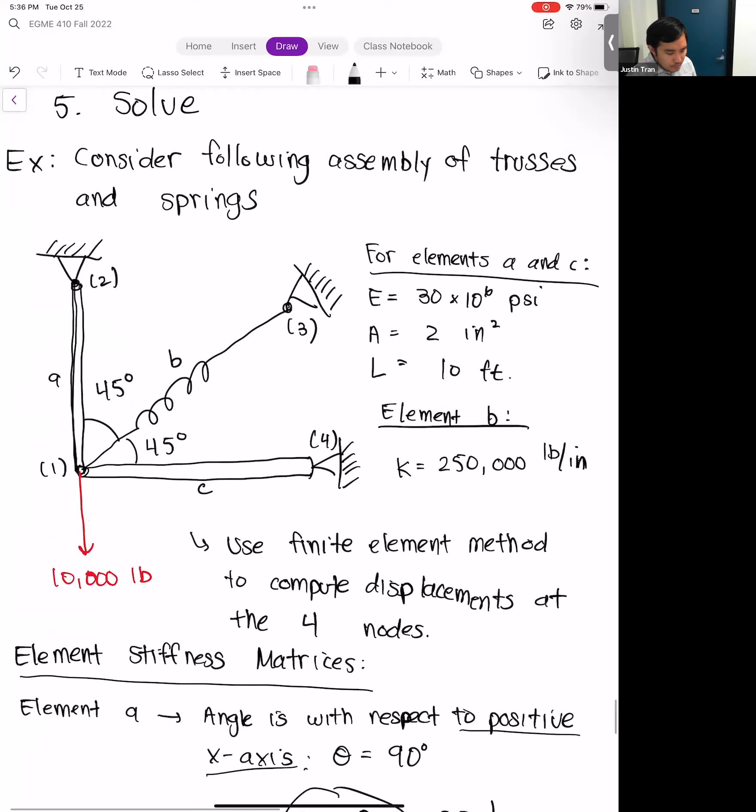Let's go ahead and pick up where we left off, which was a question: can we edit the geometry? Yeah, I don't mind if you edit the geometry. That could actually be one of your separate conditions, or one of your separate simulation situations. People were also asking if they can change the material properties as a different condition - that's definitely possible too. If you want to change the geometry for a different condition, you can definitely do that as well. I think some geometries will be easier to do that with. The bracket will probably be the easiest one because I think that's an actual design modular part, so you can open that up and change it. But yeah, feel free to change the geometry.

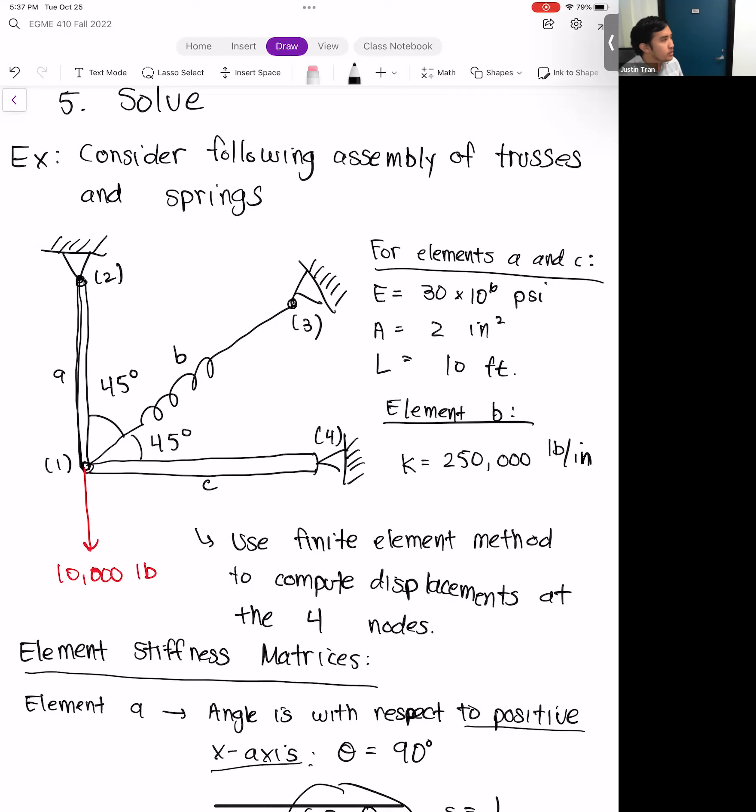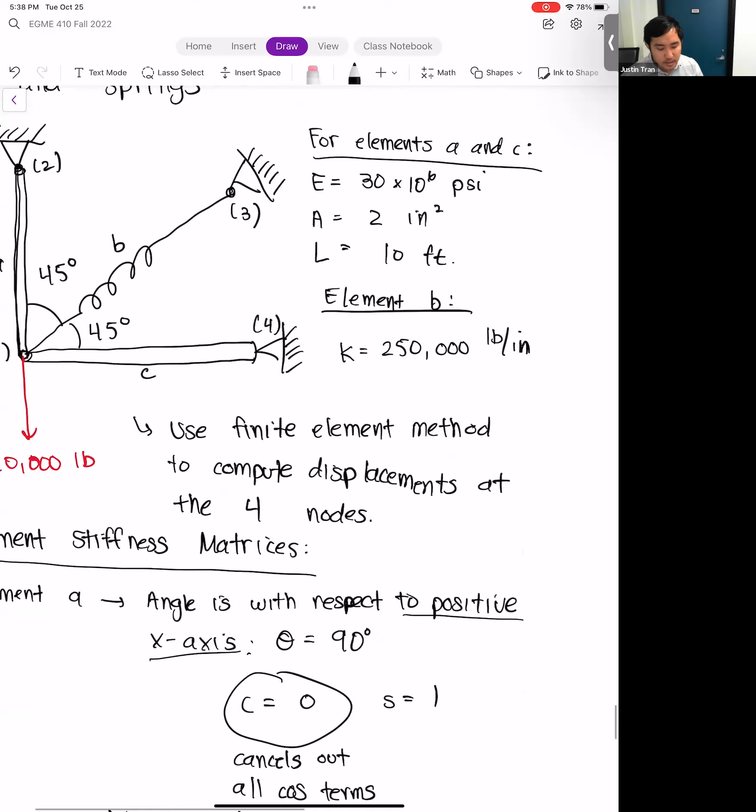Where we left off last Thursday, we were talking about how to do two-dimensional direct stiffness problems. We spent a good amount of time deriving this monstrosity - this is the element stiffness matrix for a 2D truss element. The reason we spent so long deriving this is that when we do 2D problems, we want to make sure we compute element stiffness matrices in the same coordinate system for every element. Because what can happen - let's say we have 3 elements, each oriented in a different direction. When we go through our finite element process of element stiffness matrix, assembly, boundary conditions, and solving, we want to make sure all our element stiffness matrices are in the same coordinate system.

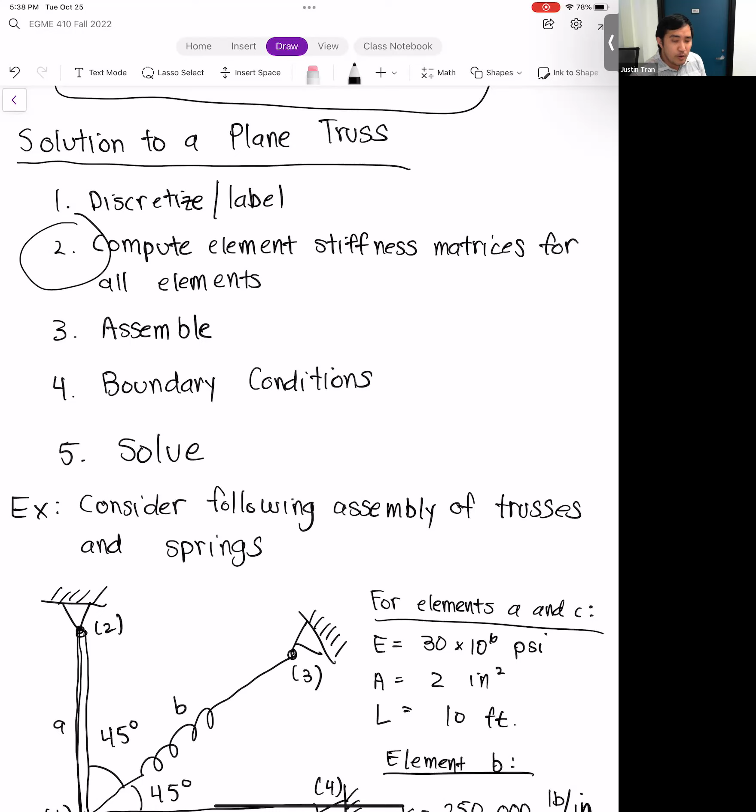Because if they're not, if they're all derived within their own local coordinate system, we can't actually assemble them into the same global system because they're all going to be relative to different parts. Okay, and so that's why we have this kind of complex 2D element stiffness matrix that contains a lot of sine and cosine terms.

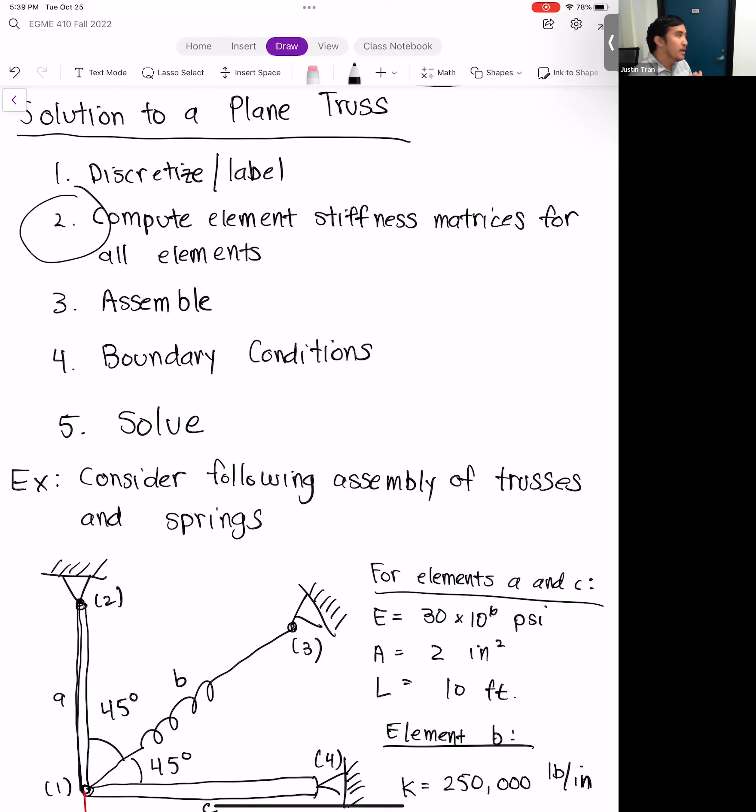Okay, but besides that, the process that we're going to go through is exactly the same. So we're going to go through this 5-step process of labeling the geometry, discretizing it, computing the element stiffness matrices, assembling everything, applying boundary conditions, and solving. It's the same 5-step process, it's just that it's going to take a lot longer because the element stiffness matrices are a lot bigger than they were before.

Okay, and so we kind of left off doing this example here. And so what we have is a 3-element system, and so we have 2 truss elements and 1 spring. And what we're interested in computing is the nodal displacements of the 4 marked nodes. So node 1, node 2, node 3, node 4. We want to compute those displacements based on the orientation of the truss elements and the load that's being applied.

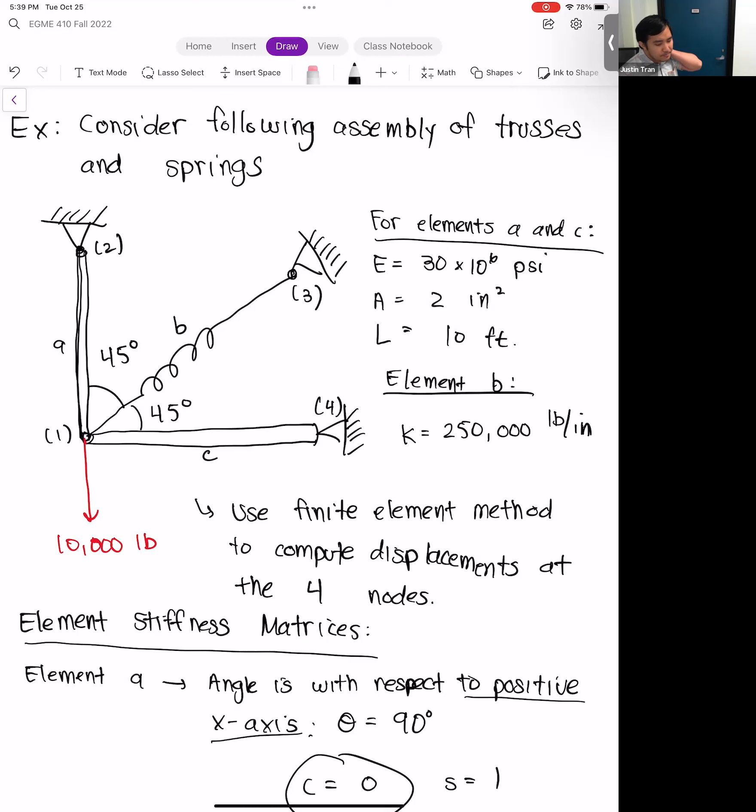All right, so of course we have the properties, the material properties for the elements. So for the truss elements, we have a Young's modulus, we have the cross-sectional area, as well as their length. And then for the spring element, we have its spring constant, which is 250,000 pounds per inch.

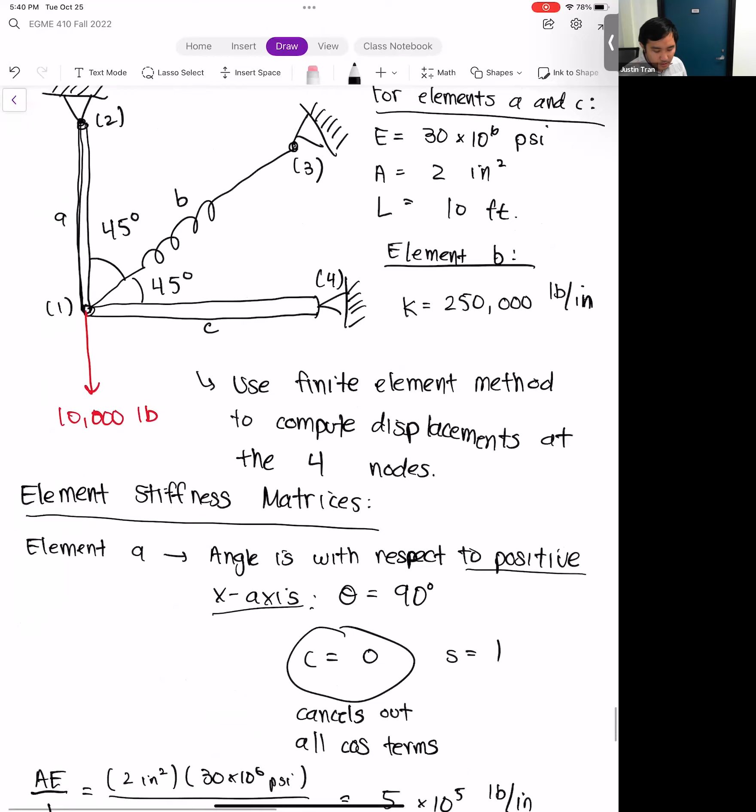Okay, and so to analyze this structure here, we're going to go through our direct stiffness methodology. So our first step is going to be to derive the element stiffness matrices for each of the elements. Okay, and so we're going to start with element A, and element A is our vertical element here.

And so what we said for element A is that the first thing we have to do is to compute its orientation. And so relative to the positive x-axis, element A is rotated up 90 degrees. So what we say is basically the theta value for this is 90 degrees.

And so the next thing that we're going to compute here are the sine and cosine of that angle. And so at 90 degrees, it's actually really simple because the cosine of 90 degrees is 0, the sine of 90 degrees is 1. And when you have one of these sine or cosine terms equal to 0, what that's going to do is cancel out a ton of the terms in the element stiffness matrix. So when we plug in cosine equal to 0 and sine equal to 1 into our element stiffness matrix formulation here, we get the following element stiffness matrix.

And so we said that Ka is equal to 5 times 10 to the 5th multiplied by this matrix, where the majority of it are zeros, and we just have ones on some of the locations.

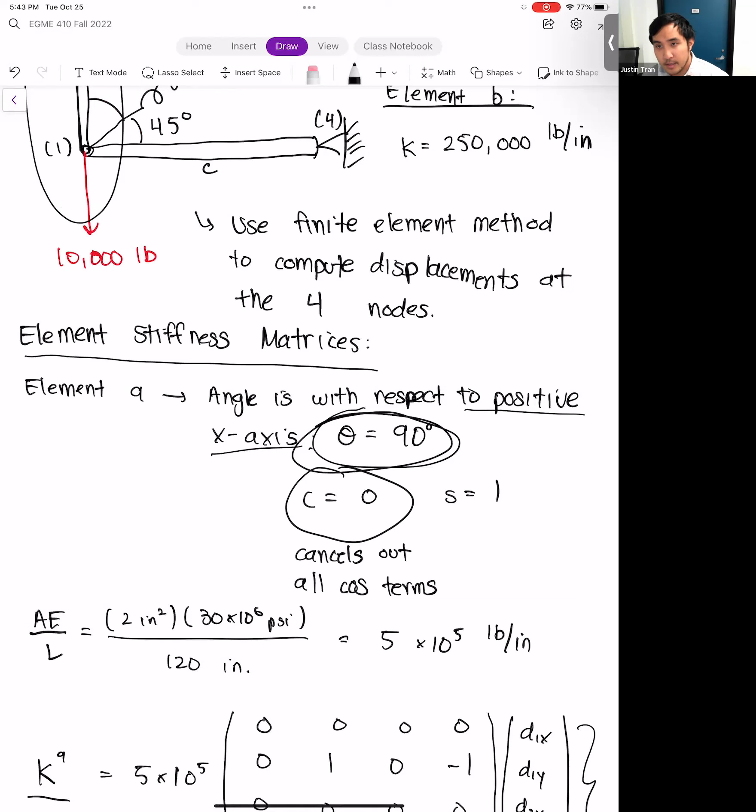Okay, so element B here is a spring, right? Our question - so d1x and d1y is used for all the elements? Yes, yes it is. Yeah, because all the elements are attached to node 1 right here, they're all going to involve d1x and d1y.

Okay, and so if we go back up to the figure here, we can see that element B is the spring, and it's kind of rotated up towards the top right. And so the angle that element B makes with the positive x-axis - okay, so the angle that it makes is 45 degrees. So that's going to be theta.

I wrote that out because for this example, the angles are kind of exactly as they appear in the figure. But in the next example, this definition of the angle as the angle that it makes with the positive x-axis is going to be key. That's why I wrote it out there.

With a theta value of 45 degrees, let's compute sine and cosine. So we have C is cosine of 45 degrees, and cosine of 45 degrees is root 2 over 2. And sine of 45 degrees is also root 2 over 2.

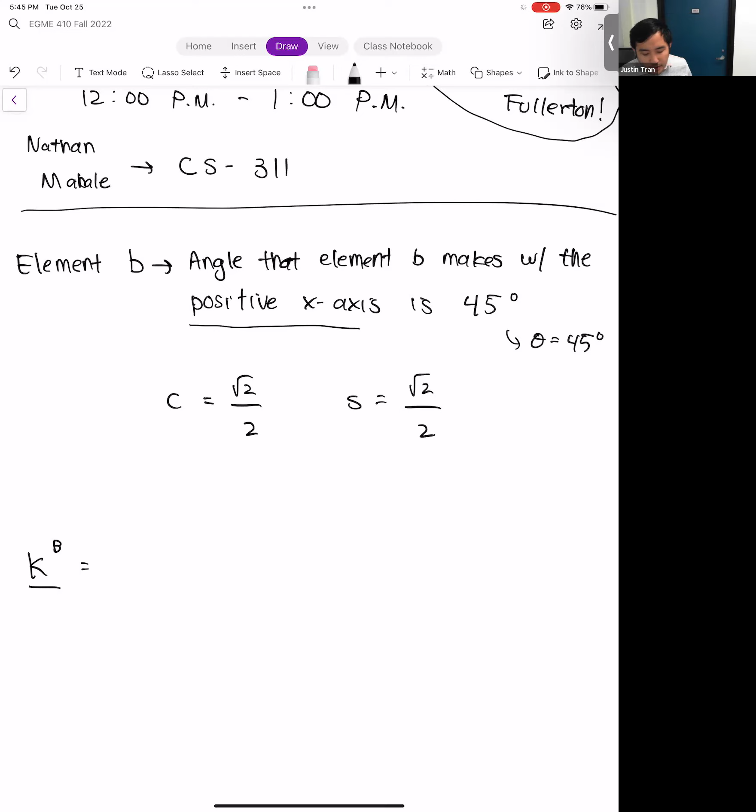And so KB - technically, we don't have the element stiffness. We haven't computed the element stiffness matrix for a 2D spring, but we can easily derive it. If you look at the element stiffness matrix for a 2D truss, what's out in front is AE over L. If this were a spring, all we're going to do is replace this with the spring constant K. Everything else on the inside stays the same, so all the sine and cosine terms are going to be the same because we derived those without really any knowledge of the truss anyway.

For element B here, our element stiffness matrix is going to be the spring constant K multiplied by all those terms. Let me write it down again: we're going to have cosine squared, cosine sine, minus cosine squared, minus cosine sine, sine squared, minus cosine sine, minus sine squared, cosine squared, cosine sine, and sine squared.

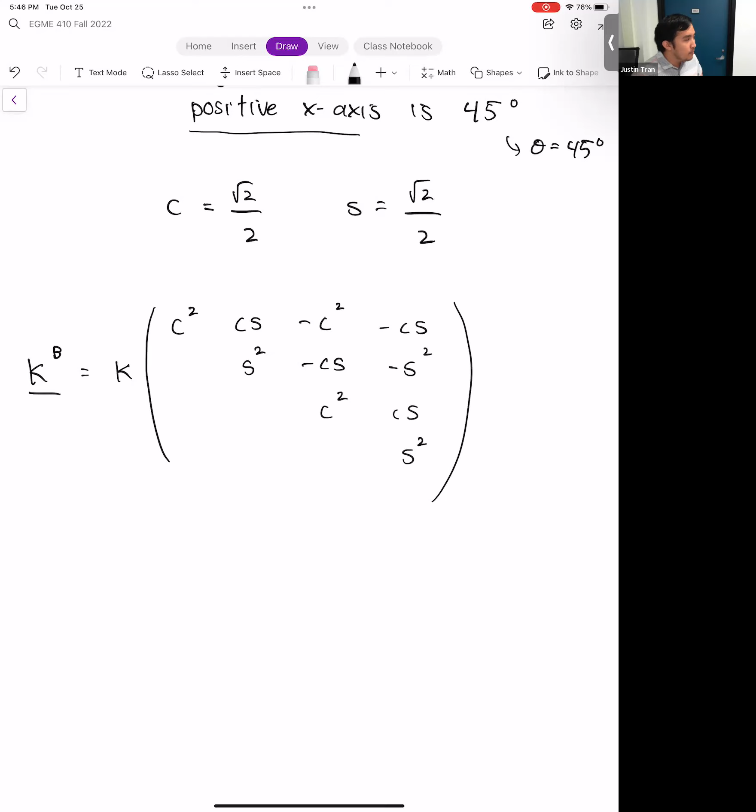Of course, this element stiffness matrix is symmetrical, so the bottom half is going to be just the same as the top half, just reflected over. Okay, so let's go ahead and plug in for this.

For this element here, our spring constant is 2.5 times 10 to the fifth. Then we're going to start plugging in for the cosine and sine terms. First we have cosine squared: root 2 over 2 squared is just 2 over 4, so that's 1/2. Cosine sine is root 2 over 2 times root 2 over 2, which is 1/2. Minus cosine squared is minus 1/2. Minus cosine sine is minus 1/2.

Among all the different angles that the elements can have - 0 degrees, 90 degrees, 180 degrees, 270 - those are the most ideal because those are zeros. But second place to that is 45, because with 45 degrees you end up with just a bunch of 1/2s. The only thing you have to worry about is the signs.

Remember the trick I taught you last time: whenever you have a symmetric matrix, you can build it up starting with the first row, and as soon as you're done with the first row, write that into the first column as well. So I do this row, column, row, column, row, column.

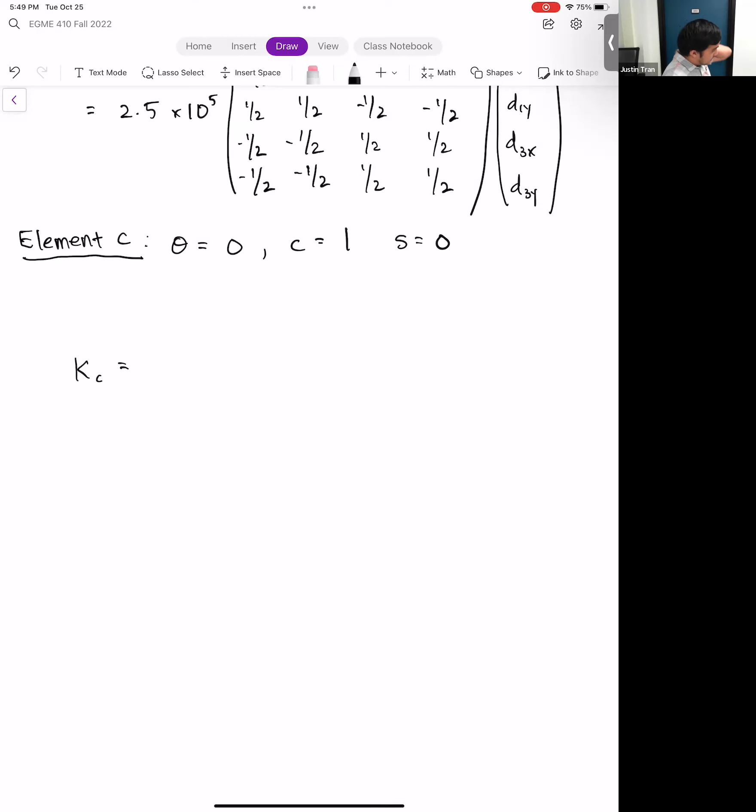With theta C equal to 0, cosine is going to be equal to 1, and sine is equal to 0. Just like before, when we have a 0 for the sine or cosine, that simplifies things a lot because a lot of things are going to cancel. So basically any term that has sine, we're just going to set that equal to 0.

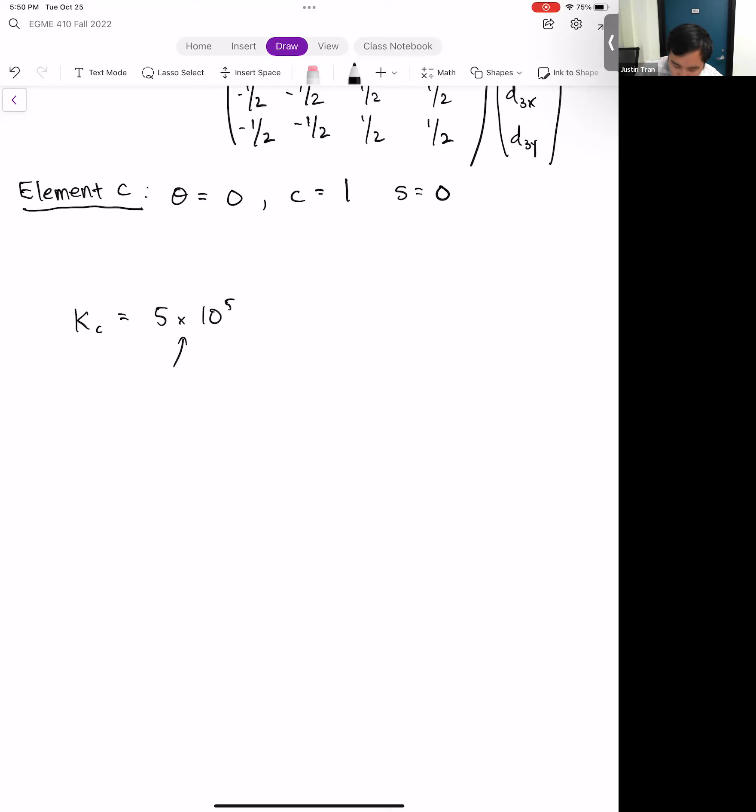For the element stiffness matrix for element C, we have 5 times 10 to the 5th. Remember, this value here is obtained by taking A times E divided by L.

I'm just going to go fairly quickly here, because with a sine equal to 0, most of the element stiffness matrix is going to be 0. So we end up with an element stiffness matrix like that.

Since element C here is connected to nodes 1 and 4, we're going to indicate that like that. All right, so that's step 1. These are our 3 element stiffness matrices. Remember, you should get 1 stiffness matrix for every element. Are there any questions on anything we've done so far?

Okay, so now that we have the element stiffness matrices for each of the elements, the next step is to assemble. This is the step that gets a little bit difficult to do.

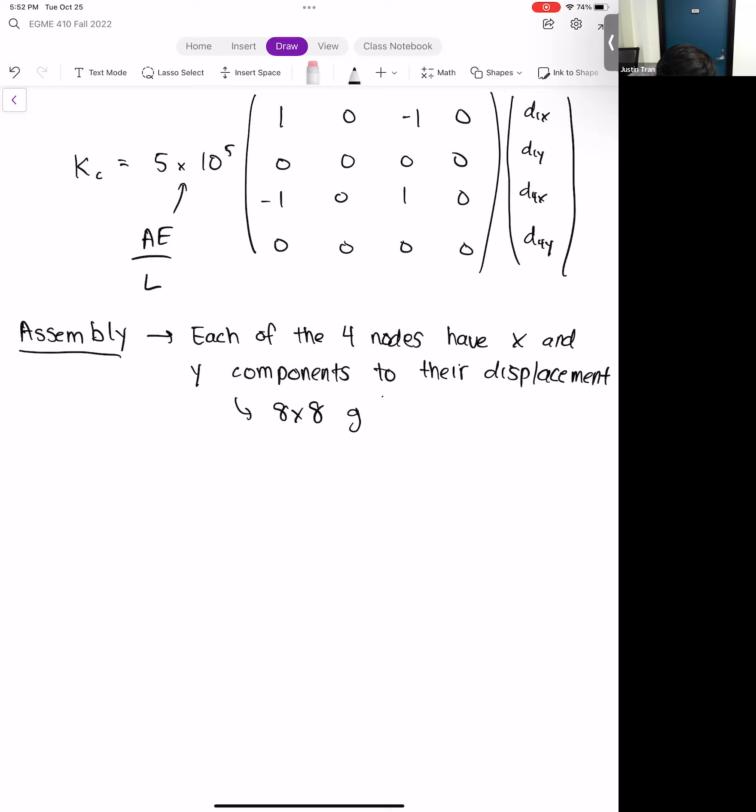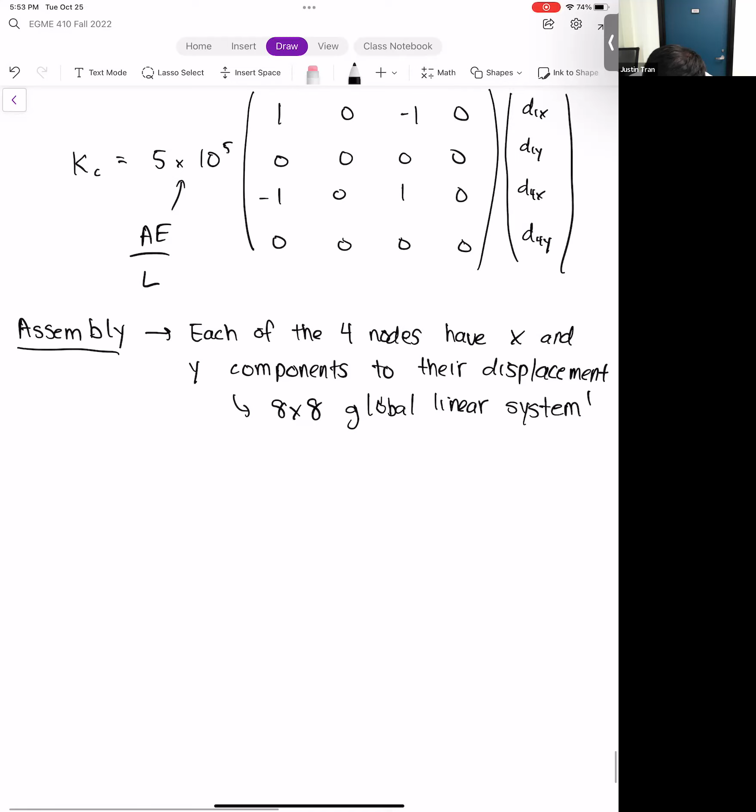That means 8 equations and 8 unknowns. I want to make sure I give myself a lot of space for this. So first let's write the forcing vector: F1x, F1y, F2x, F2y, F3x, F3y, F4x, F4y.

And then we have the corresponding row: D1x, D1y, D2x, D2y, D3x, D3y, D4x, D4y. I'm going to go ahead and label the columns as well, because we're going to need to stick in the element stiffness matrices into each entry here: D1x, D1y, D2x, D2y, D3x, D3y, D4x, D4y.

As we start to do more and more of these problems, more complicated problems, it starts to get more difficult to squeeze it into one page. So what I see a lot of from students is that once we get to this section, a lot of people actually do their homework horizontally instead of vertically, just because these matrices are so big and they need more space to write it all down, which is fine with me.

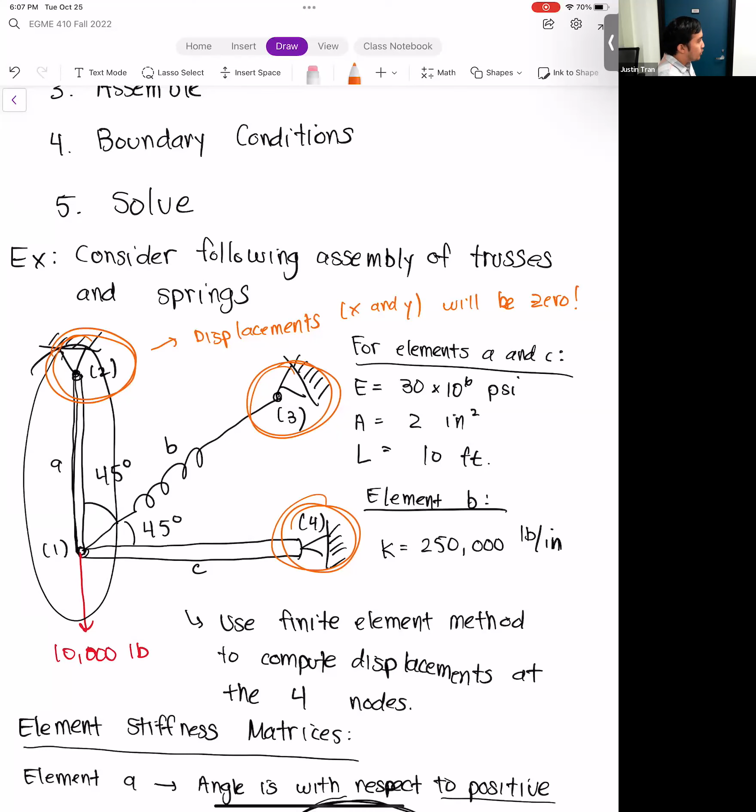That goes for the X and Y displacements. So anything that has a 2, a 3, or 4, we're just going to apply our fixed support to those. Okay, so let's go back to the system here.

Node 2 is of course going to be these two rows. Go ahead and circle that. That's node 2, or everything associated with node 2. These are the rows associated with node 3. These are the rows associated with node 4. We're about to basically annihilate all these rows in the name of the fixed support.

Remember, what we do for fixed support is that we set the forcing vector equal to 0 for those ones. So F2x, F2y, F3x, F3y, and F4x and F4y are all going to be 0. And then the other thing that we do is that we eliminate each of the rows associated with those fixed supports.

Let me do it for node 2 first. What we're going to do is we're going to replace that with a row of mostly zeros, except for a 1 on the diagonal. So for row 3, which is associated with D2x, we're going to put a 1 on the third column. And for D2y, we're going to put a 1 on the fourth column.

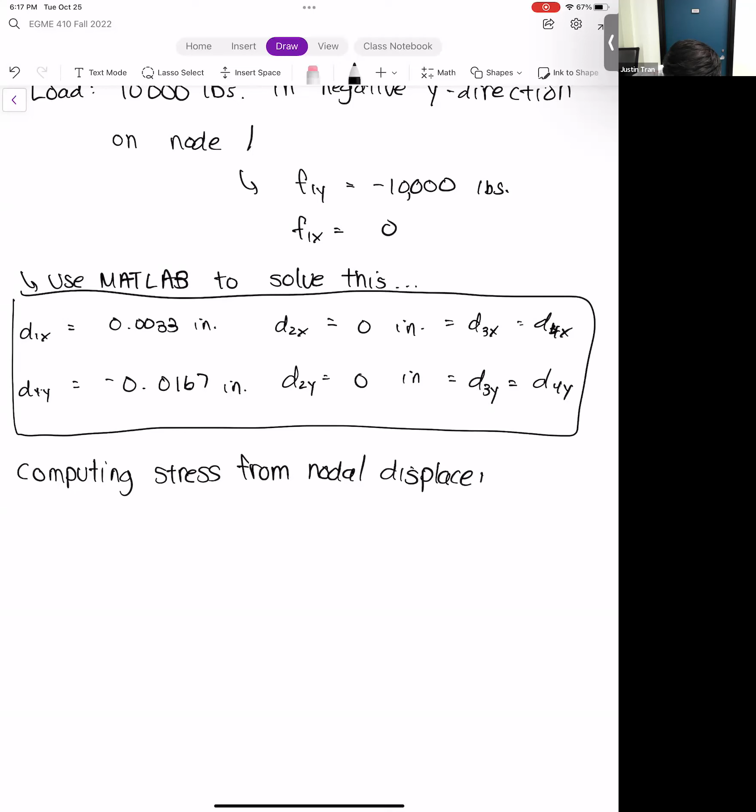Okay. Actually, let me go back a bit.

Okay, so computing stress. I'd say this is probably one of the highlights of using FEA compared to traditional methods - you can compute the stress, and ANSYS does it pretty easily. We're not going to produce a nice stress distribution like you see in ANSYS, since we're doing much simpler problems, but we can still compute the stress in each element.

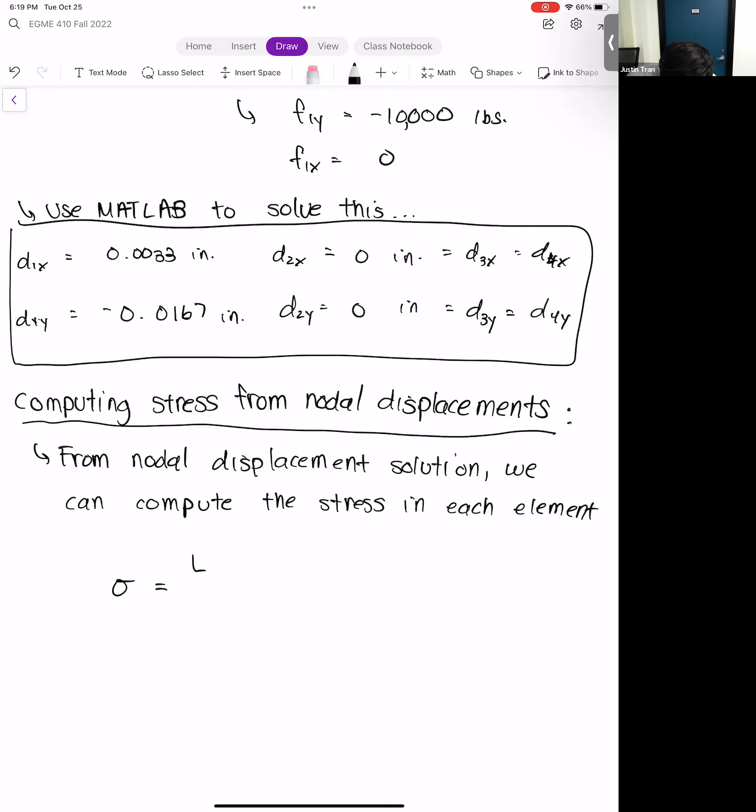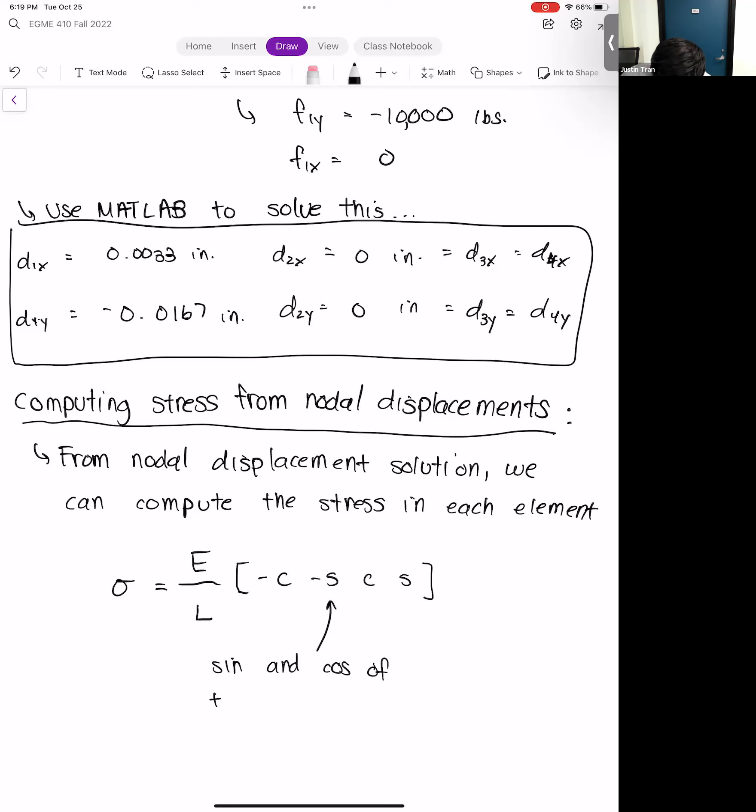The formula we have is: the stress in the element equals the Young's modulus of that element divided by the length of that element, multiplied by a row vector: minus cosine, minus sine, cosine, then sine. Remember, these are the sine and cosine of the element's angle. Every element has its own orientation angle, and we're going to plug that angle in here, very similar to how we did it for the element stiffness matrix.

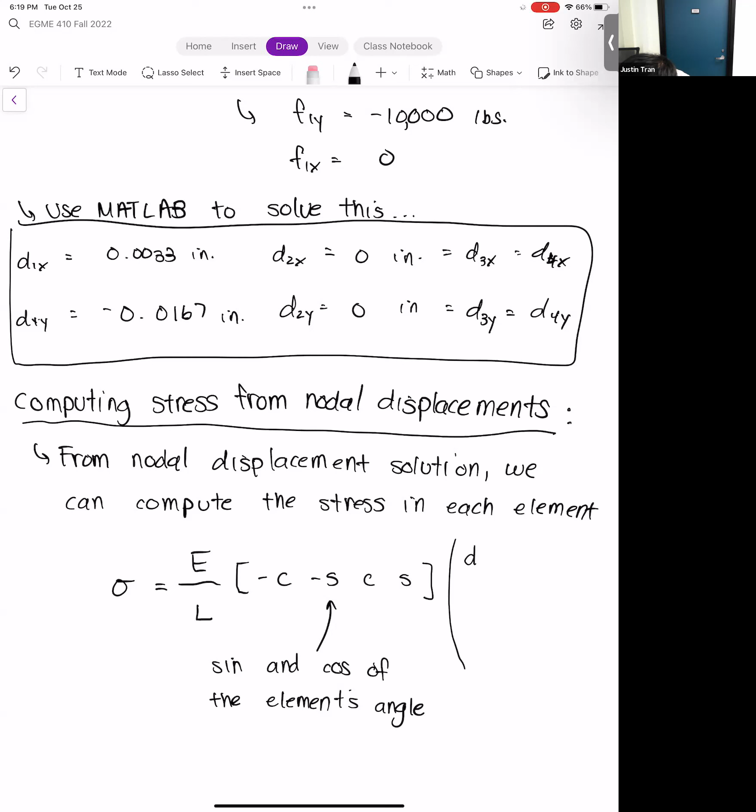Then we multiply this row vector by a column vector, where this column vector is the nodal displacement solutions for the nodes connected to that element. It's a mouthful, but every element is connected to two nodes, so we just plug in the solution for those nodes here.

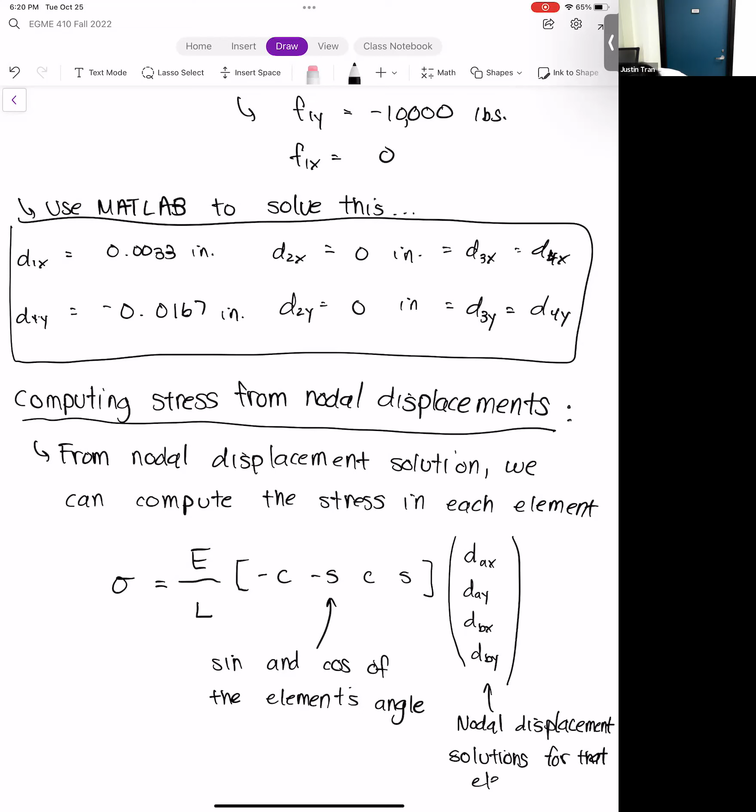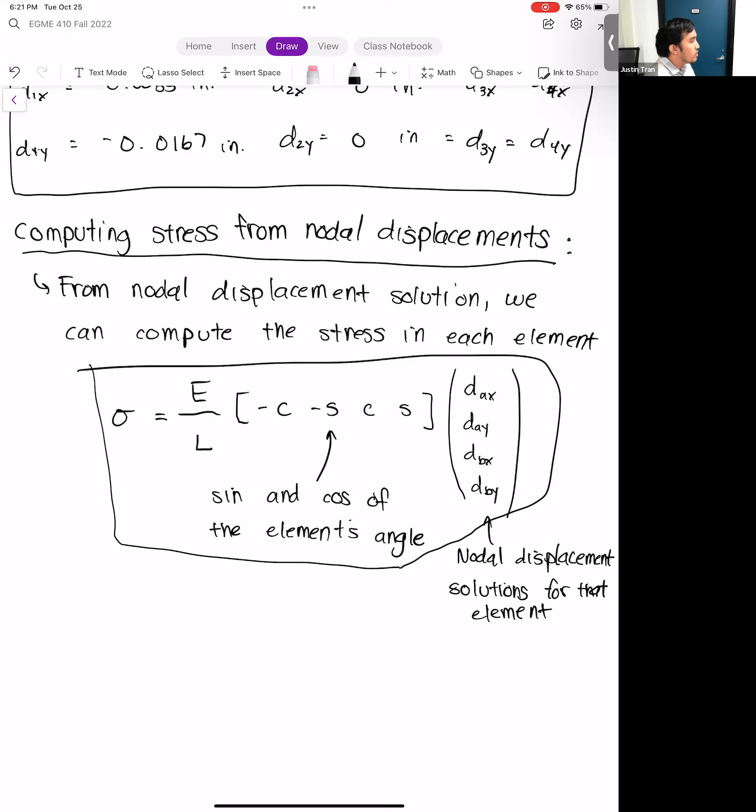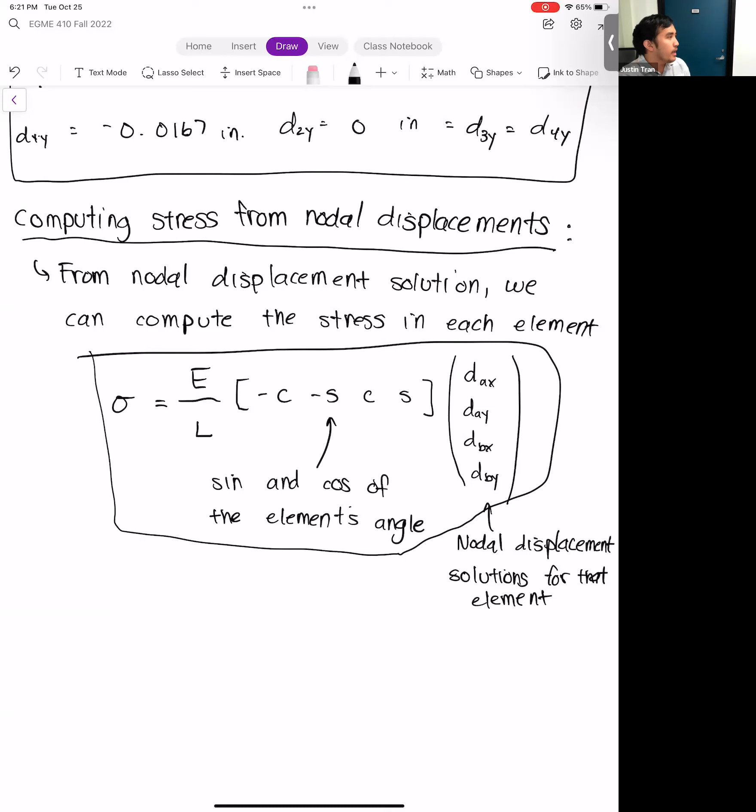I tried to avoid using D1X, D1Y because I want to highlight that every element is attached to a different node. I don't want you to confuse this and think you need to plug in D1X, D2X for every single one. That's why I used DAX, DAY, DBX, DBY - node A and node B being the nodes attached to that element. So let's compute the stress in element A.

We can only really do this for the truss elements, not for the spring. So we have E over L multiplied by the row vector. Theta for element A is 90 degrees, remember. Cosine of 90 is 0, minus sine is -1, 0, and then 1.

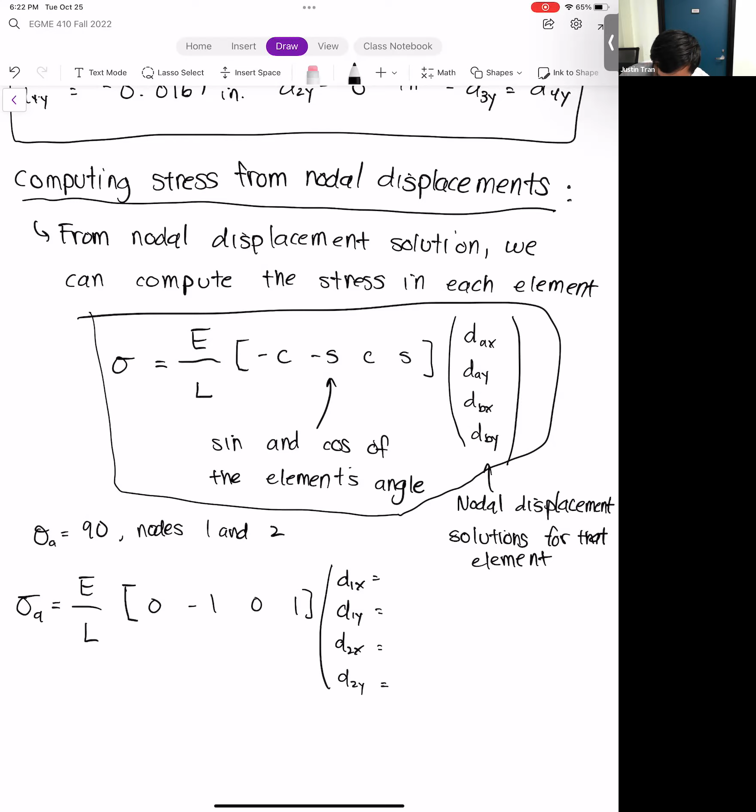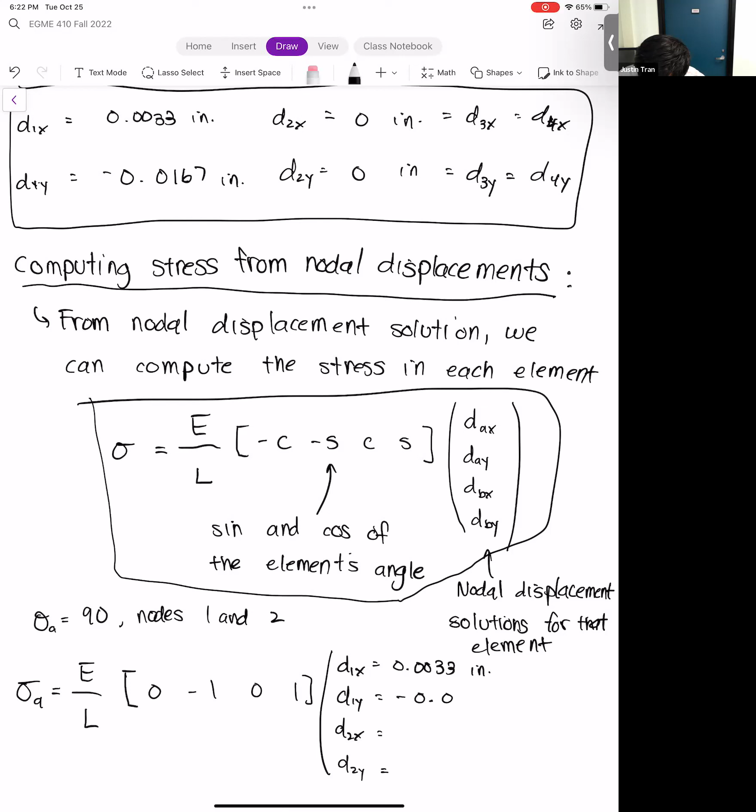Then for element A, remember element A is connected to nodes 1 and 2. So the displacements we plug in are D1X, D1Y, D2X, D2Y. From above, we know D1X is 0.0033 inches, D1Y is -0.0167 inches, and D2X, D2Y are both 0.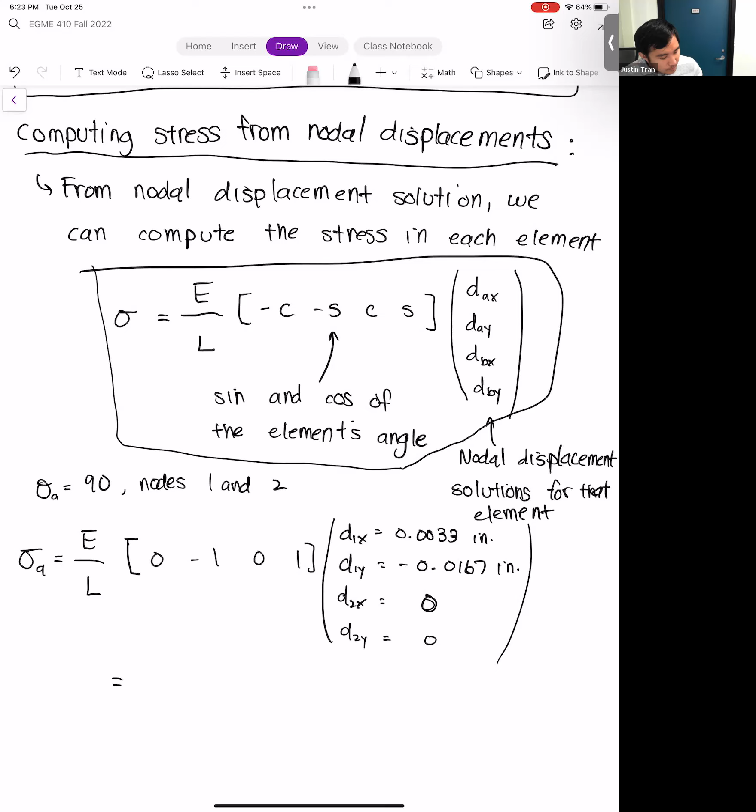So we have a row vector multiplied by a column vector, which gives us a scalar since it's basically a dot product between those two vectors. If we perform that and multiply by E over L, what we get is 4,175 PSI.

Since this stress is positive, a positive stress means that element is in tension.

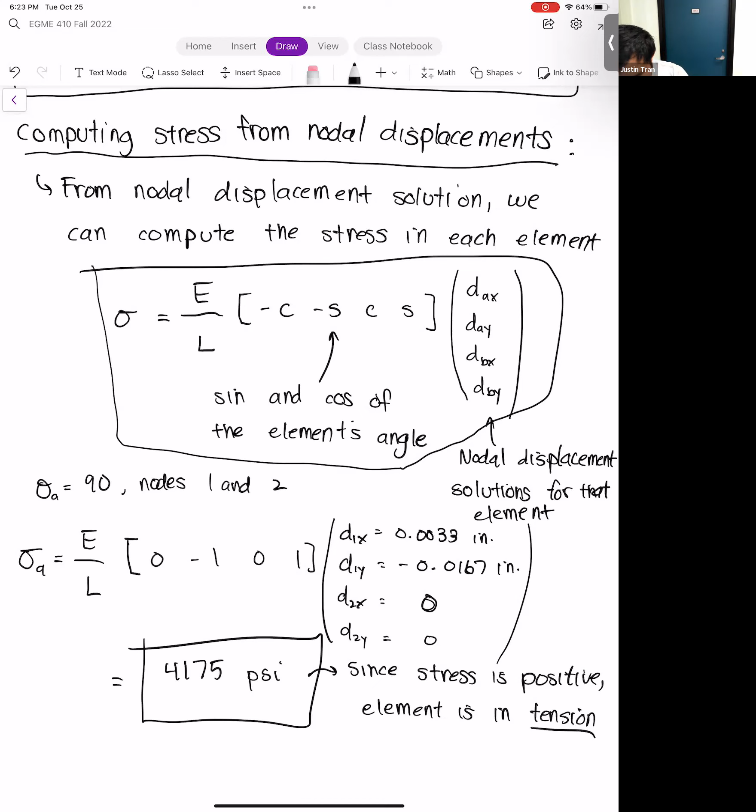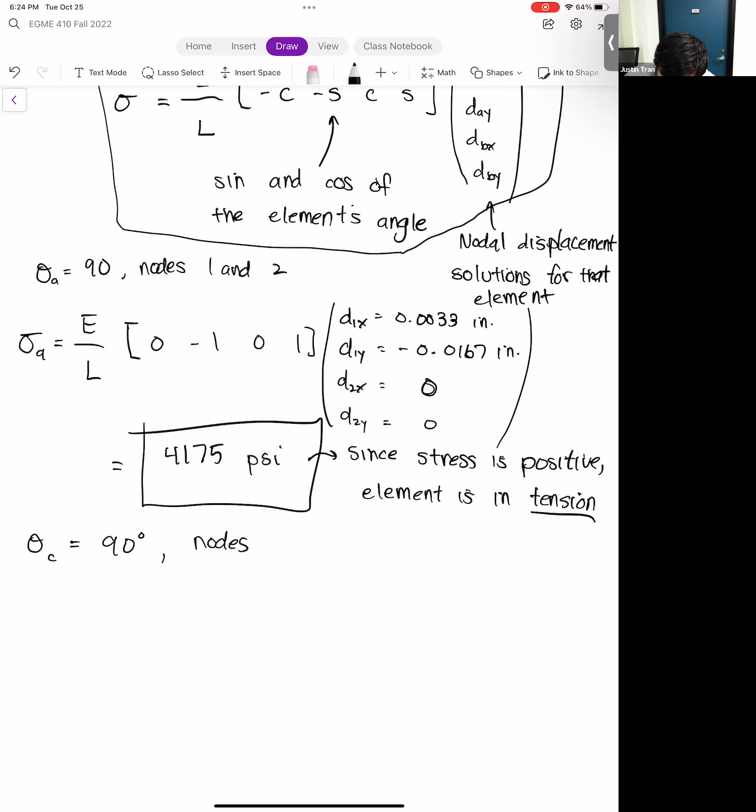So theta C, remember, is 0 degrees, and it's connected to nodes 1 and 4. So sigma C here is E over L multiplied by cosine, minus cosine of 0, which is -1.

It is 0. Cosine, minus cosine of 0 is -1, minus sine of 0, which is 0. Cosine of 0 is 1, and sine of 0 is 0.

And then we're going to multiply this by the nodal displacements for element C. Element C here is attached to nodes 1 and 4, so we have D1X, D1Y, D4X, D4Y. So go ahead and plug in.

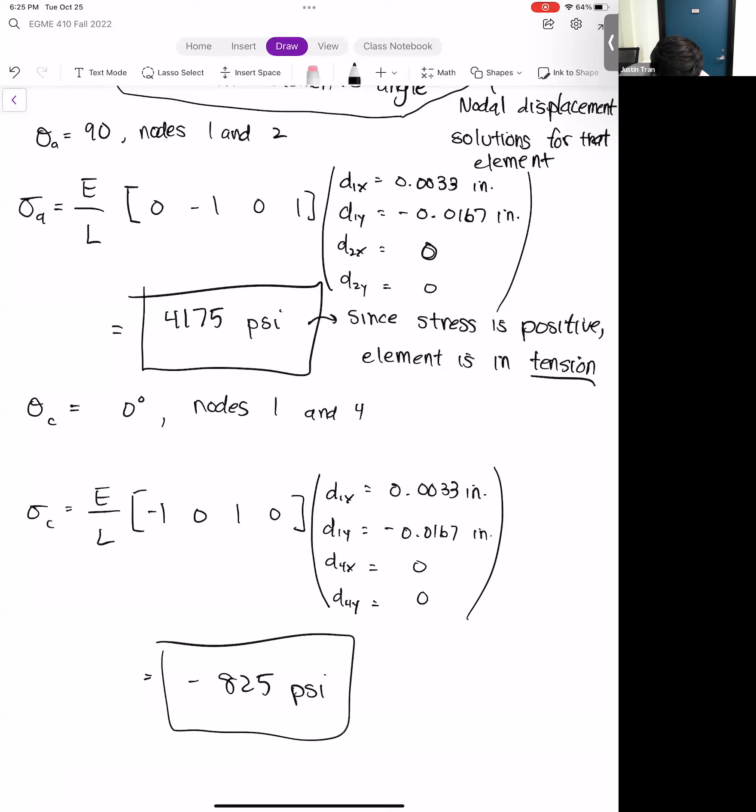And so if you plug in all the displacement numbers, what you're going to get is -825 psi. And since the stress here is negative, the element is in compression.

And so that's kind of a quick and easy way that you can compute stresses in these direct stiffness systems. It's fairly crude, and we're kind of just limited by the size of our elements here. But this is kind of what we expect from finite elements, to be able to compute stresses like that.

Question: why did we skip B? We skipped B because it was a spring, and we can't compute stresses in a spring because the spring is kind of coily and doesn't have a constant cross-sectional area and everything like that.

All right, any questions on this? Okay, we have about 20 minutes left in class, so unfortunately I think we're going to have to start an example and leave it for next time again. But I do want to cover this example before we move on to beams.

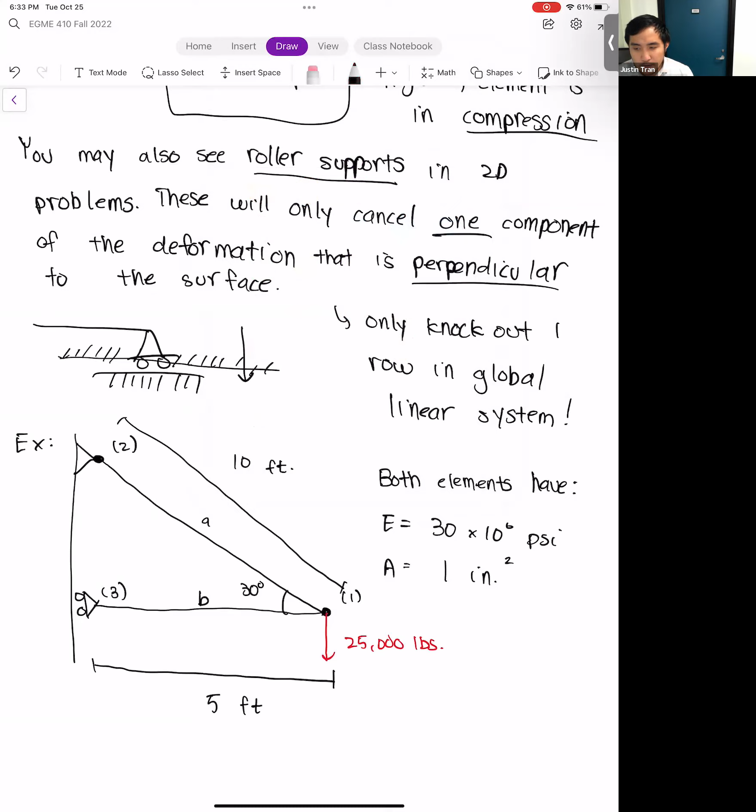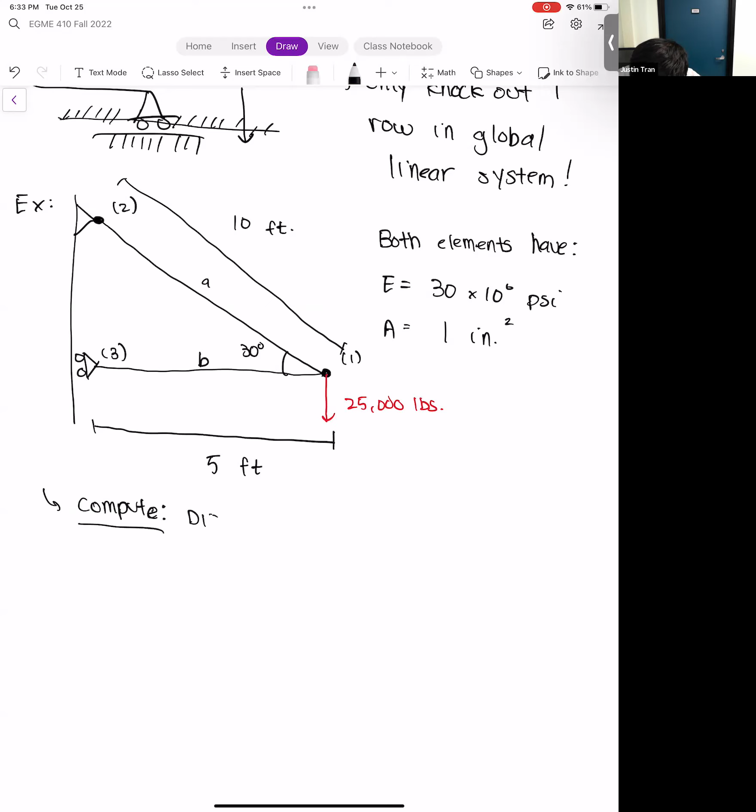That's going to require us to go through the direct stiffness method. So we're going to go element stiffness matrix, assembly, boundary conditions, and solve. I'm going to go a little bit faster on this one just because it's a simpler system and we've kind of seen this already. There are a couple nuances to this that we haven't seen before though, so I'll make sure to pause on those, but for the rest of it I'm going to go a little bit fast.

Okay, so before we begin solving this problem, are there any questions on just the setup for the problem?

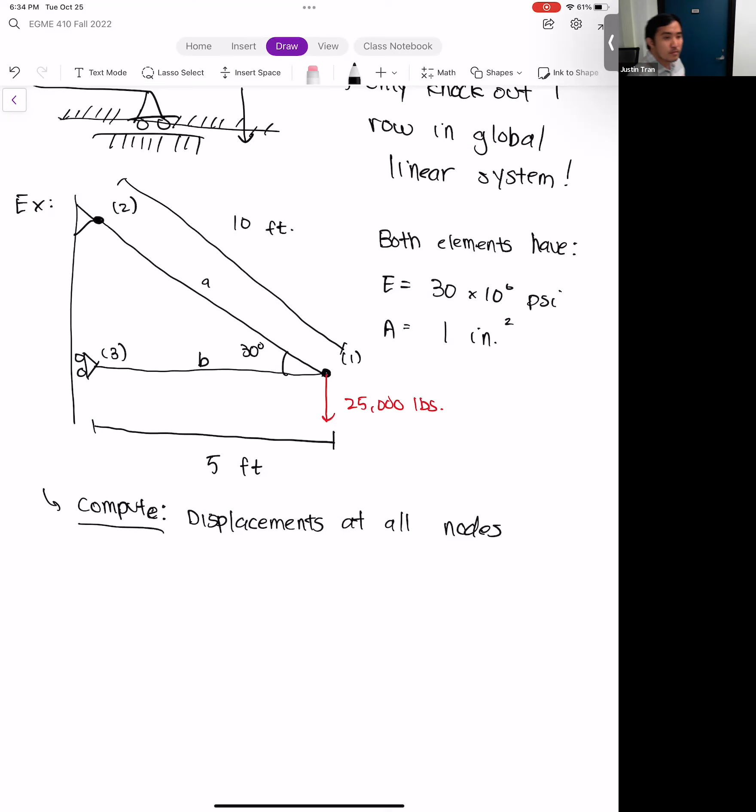Okay, all right, so let's go ahead and start writing out the element stiffness matrices. Let's start with element A.

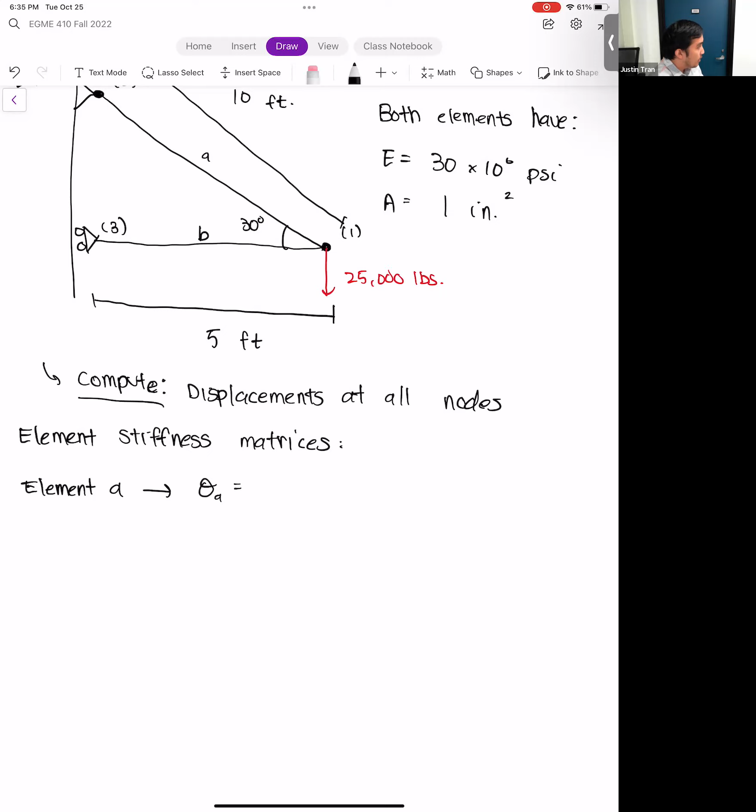Before we write out the element stiffness matrices, the first thing we have to determine is what the orientation for element A is, right? So we need theta A.

Here's where it gets a little bit tricky. You kind of have to look at the geometry carefully, and you have to look at the labeling really carefully as well, because that's going to determine this. If you look at this figure, element A consists of nodes 1 and 2, and it's angled upwards and to the left. The tempting thing to do here is to say that theta A is 30 degrees, because that's the angle we see exactly in the figure. But I'm doing all this buildup because it's actually not 30 degrees.

Let me go ahead and draw another figure here to show you why it's not 30 degrees. We'll draw element A separated from everything. What I'm going to do is draw an arrow that goes from the lower numbered node to the higher numbered node. You want to draw an arrow from the lower node to the higher node, and that's going to be kind of like a vector that defines the direction for that element.

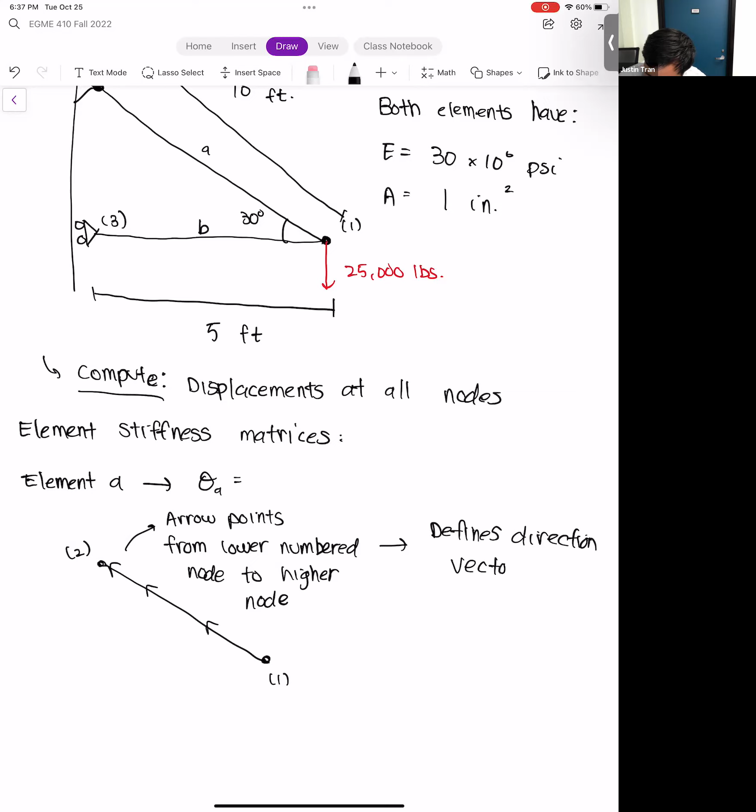Next, what I'm going to do is overlay the positive x-axis on this element, starting at the lower numbered node. So what I did here was overlay the positive x-axis.

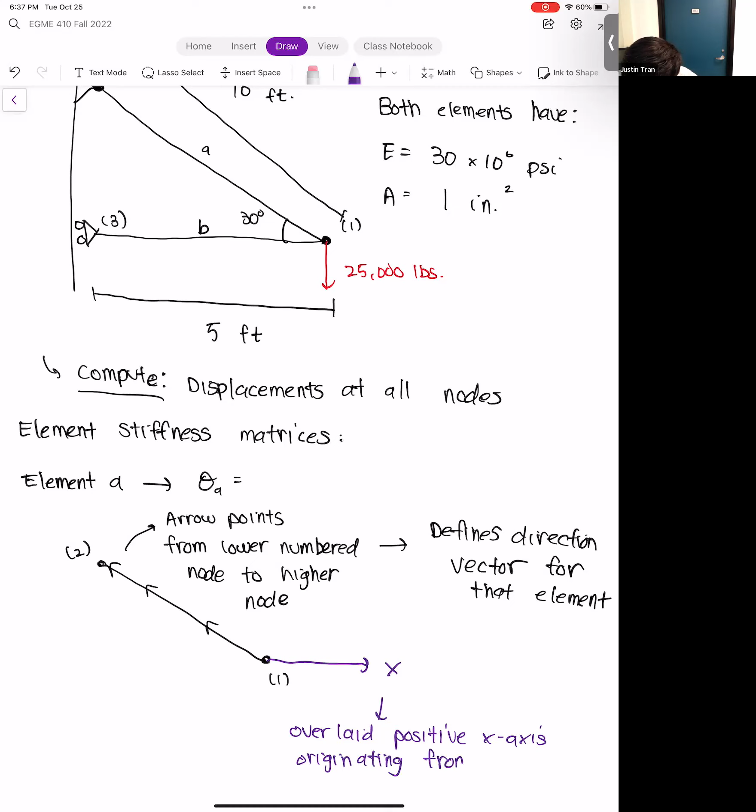In this case, the lower numbered node is node 1, so I'm going to draw a horizontal line that goes to the right, because that's the positive x-axis. If you remember from earlier today, the angle we actually use in the element stiffness matrix is the angle formed between the element and the positive x-axis. So if the positive x-axis starts at node 1 and goes to the right, then the angle we actually want is this obtuse angle here.

So that's what theta A is. And you can see from this figure that it's not 30 degrees.

Question: can you also go the other direction and just have it as a negative value? Yeah, you could use negative angles here as well. This, of course, is going to be a counterclockwise rotation. Going from the positive x-axis to somewhere else, that's counterclockwise. But if you want to use a clockwise rotation, then you just make it negative.